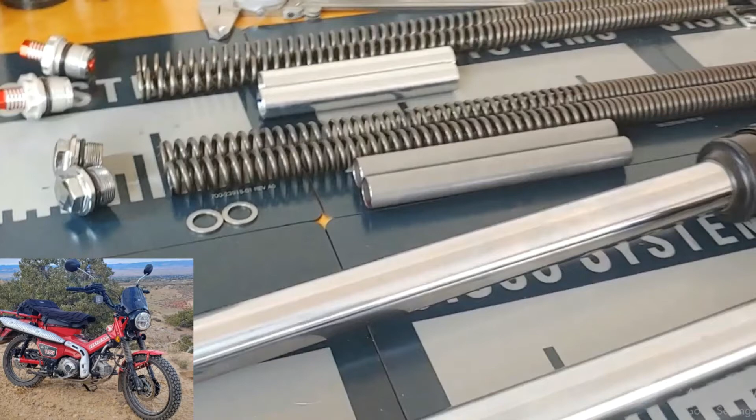Hey y'all, this is just my thoughts and my experience this summer with the YSS kit on the Trail 125. I'd recorded some video of the install and I was going to post that, but I wanted to preface it with this bit first.

Right off the bat, my fork was kind of clunky and seemed to bottom really easily. I just chalked it up as a quirk of the bike. So I bought the YSS kit that first month, didn't see any other options out there, just assumed it would be an upgrade, and rode it all summer long.

And was never really happy with it. It didn't really bottom any less, frankly. So, kind of a long summer-long review of the kit and how it performed. What I ended up doing, I went back to the stock spring, and I took the forks completely out of the bike to install the kit. But if you're watching this to see that process, I can save you a lot of trouble and tell you definitively, you do not have to remove the fork from the bike to install the YSS kit.

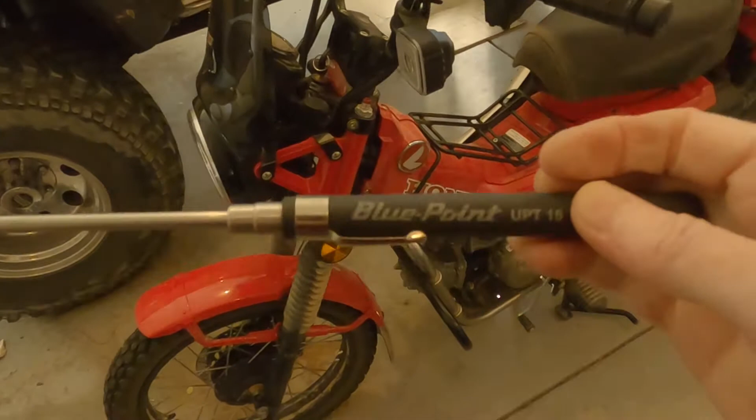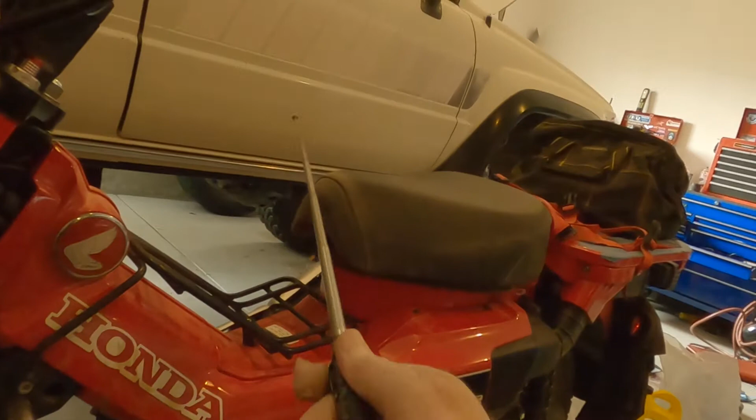All you need is a magnet. This happens to be a Blue Point I bought many years ago, pretty strong. But all you have to do is take the top cap off and pull the components out with a magnet. No brainer, right? I should point out this is a telescoping magnet, it's quite long, but you don't need anything this long to get the stock components out.

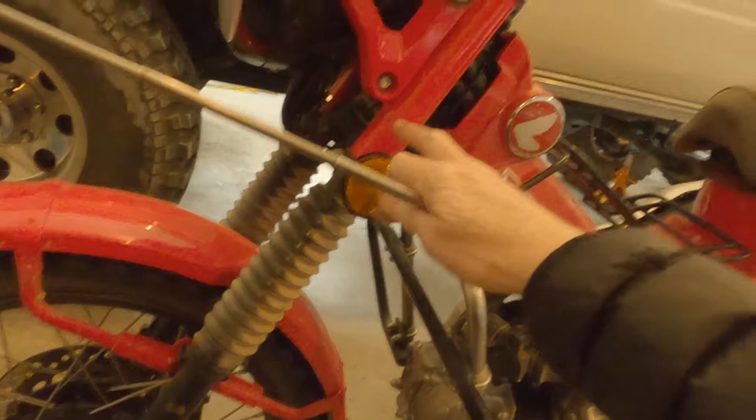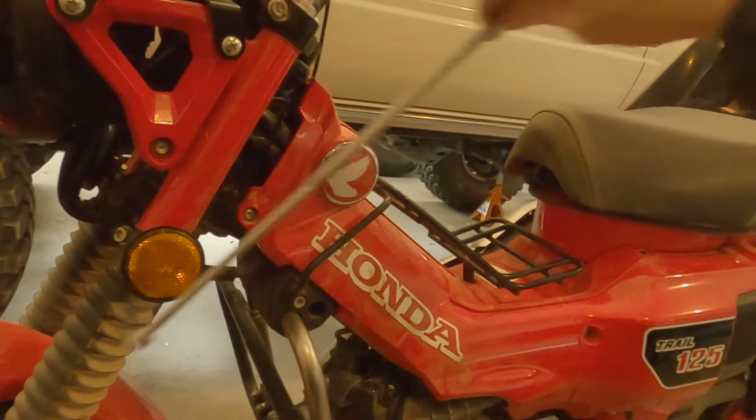If you can visualize, your spring's going to sit down here. It comes to about here or so, and then you've got a little washer, and then the spring spacer itself underneath the cap. So to remove the stock stuff, a magnet 10 or 12 inches long would probably do it.

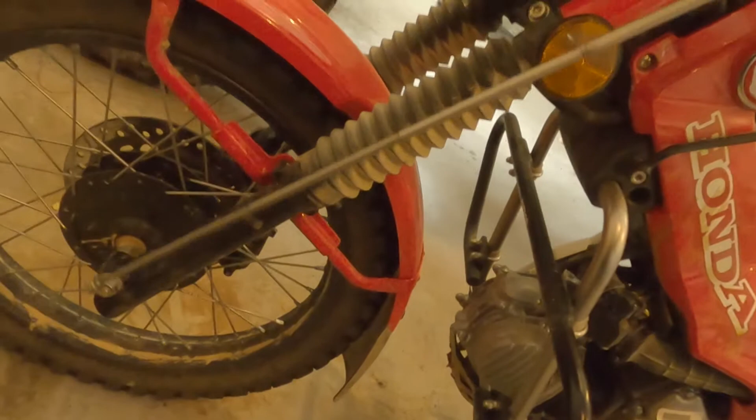But I wanted to point out, if you install the YSS stuff and ever want to remove it with a magnet, keep in mind that besides the spacer, washer, and spring, you've also got the little PD valve all the way down here in the bottom. So to remove that with a magnet, you're going to need something quite long to reach almost down to the very end. Food for thought.

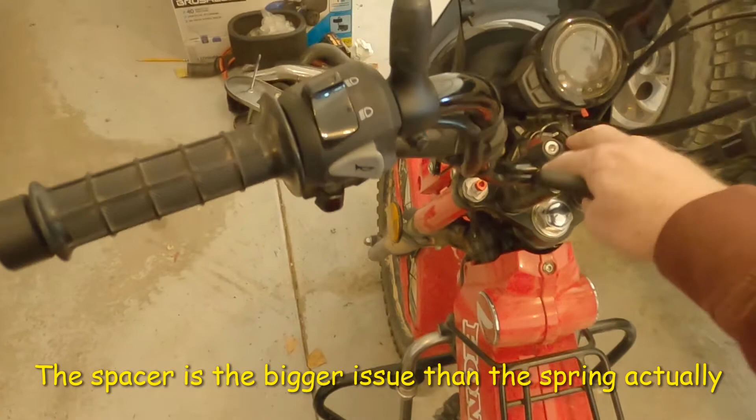The only thing I had to do was get the bars out of the way, since the spacer pulls straight out. I just loosened mine and set them up here and had total access to it. Very simple — it saves you, I was going to say half the time, but it's even less than that. It's really quick, whereas taking the forks off is pretty involved: the wheel, the brake, getting the tubes out of the trees. I did film that process as well, but I don't see the point of posting it because you don't need to do it.

Also learned this little tidbit, just learning as you go — the Allen bolt on the bottom is a drain bolt, so you can drain your fluid.

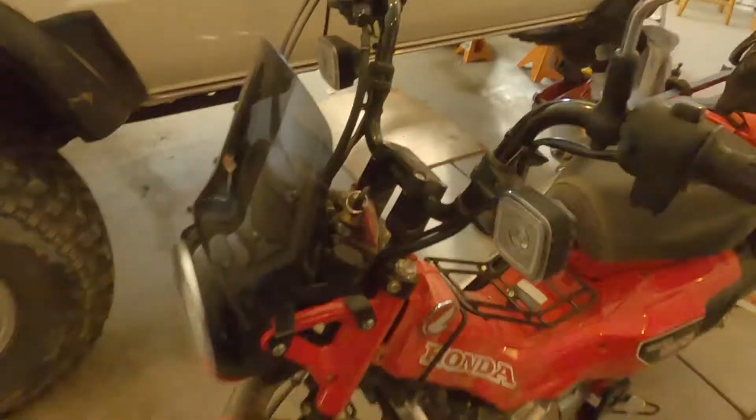Once you install these preload adjusters, I started with them all the way out, obviously, just barely touching the top of the spring. What I ended up doing over time, every ride I'd go on, I'd put in a turn or maybe a turn and a half. I put a mark on the top of them and counted my rotations, kept a 10 millimeter wrench in my pocket, and every time I'd stop I'd put a little more preload on them. I quickly lost track of how many revolutions, as you do.

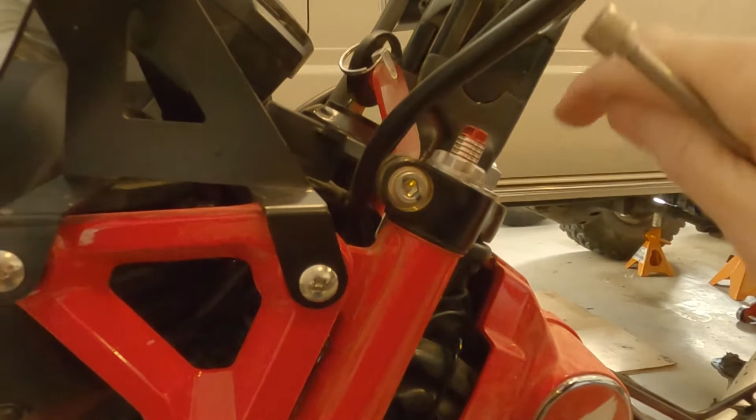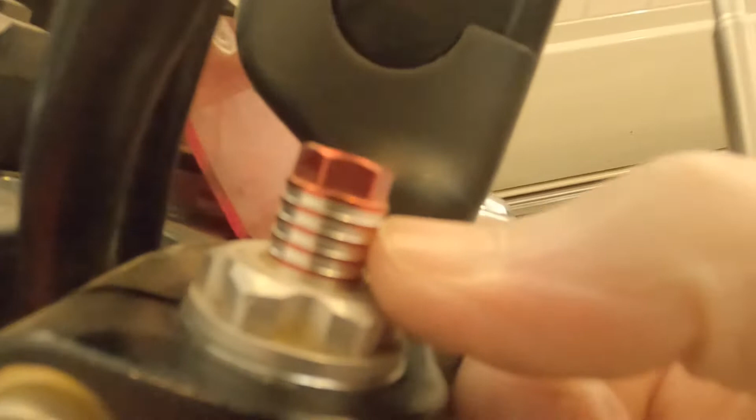So I ended up tracking it by the anodized red lines, and just matched them left to right. But long story short, I got all the way to the top — I went through the whole range of adjustment.

And what I would say is, roughly about halfway through the travel of this thing, the fork gets noticeably stiffer, more so than any point up to there. It just all of a sudden seems to get really hard — going down the road, it's just more jarring. It's kind of hard to describe, but it seems to get stiffer but not better, if that makes sense. It didn't bottom any less, that's the moral of the story. Even cranked all the way, I was still getting bottoming.

And all I can think of, and as I said in the other video, I'm not an engineer — I don't know what the hell I'm talking about most of the time.

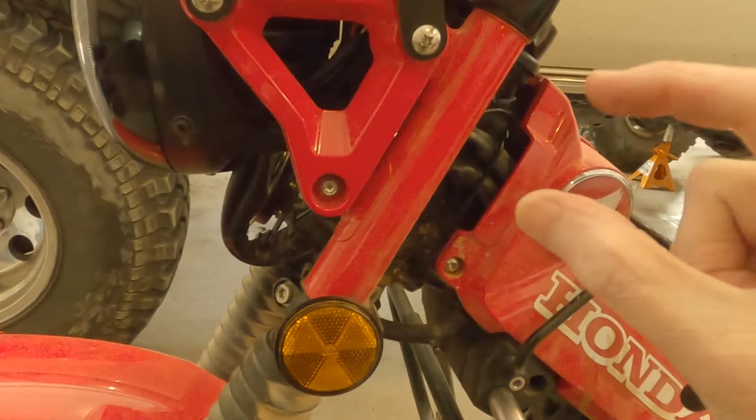I think what's happening partially is the more you compress the spring, you're losing travel out of the spring, right? You're compressing all those coils, so there's less travel to work with. And I think that's why it's still bottoming.

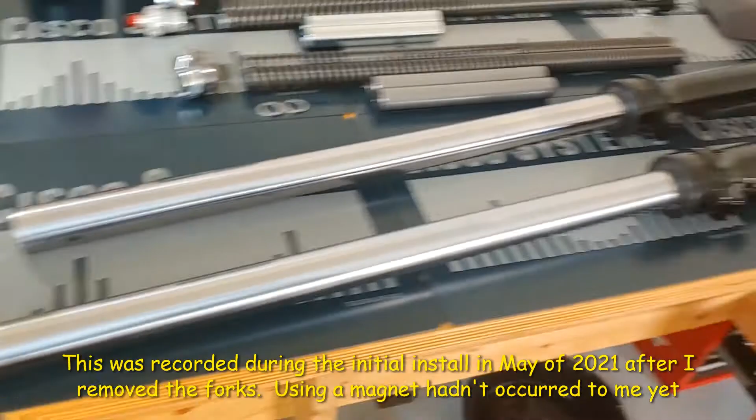Here's the YSS kit next to the stock components. I got both forks completely disassembled and drained. YSS kit here on the top, and stock components here.

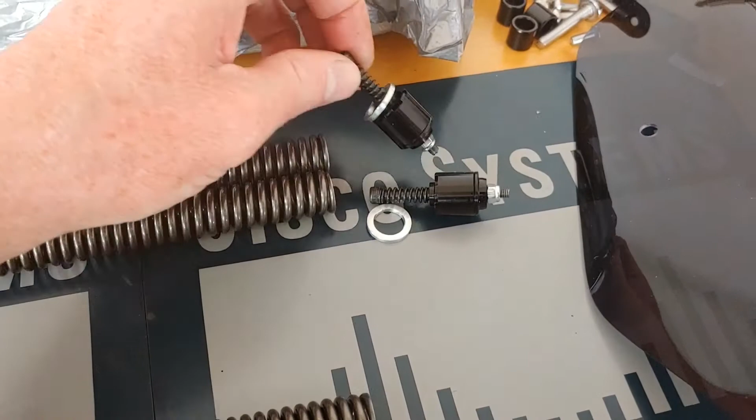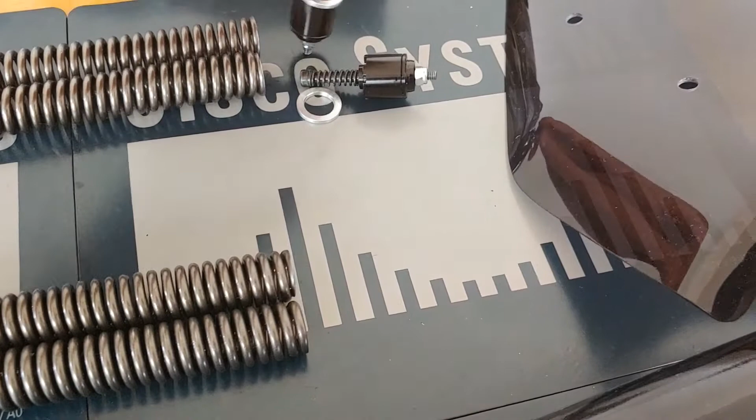Biggest difference you'll notice when you get it is the addition of this valve. They call it the PD valve. Installs at the bottom here of the spring. This is the bottom of the fork. Stock setup doesn't have this. Mine came taped into the packaging like so with this spacer on the valve. I'll point out more in a minute why I'm mentioning that.

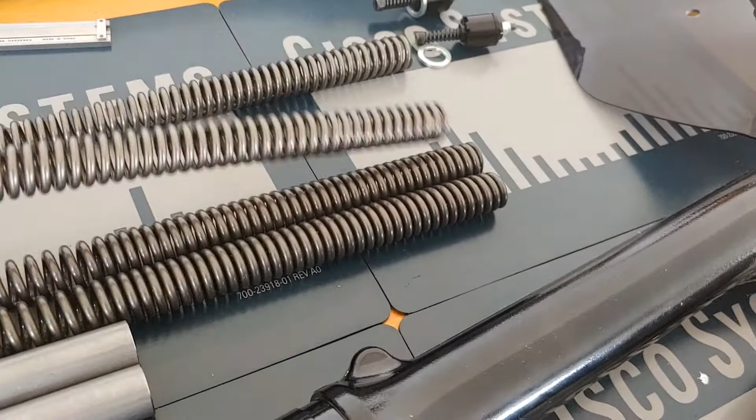The spring is different in a couple of ways. It is slightly longer, the YSS spring. And initially I thought it wasn't wound quite as tight. But if you look at it, the gap between the coils is a little bit bigger than the stock spring. But the more I stared at it, I realized what it is that the wire diameter of the YSS spring is a smaller diameter than the stock spring.

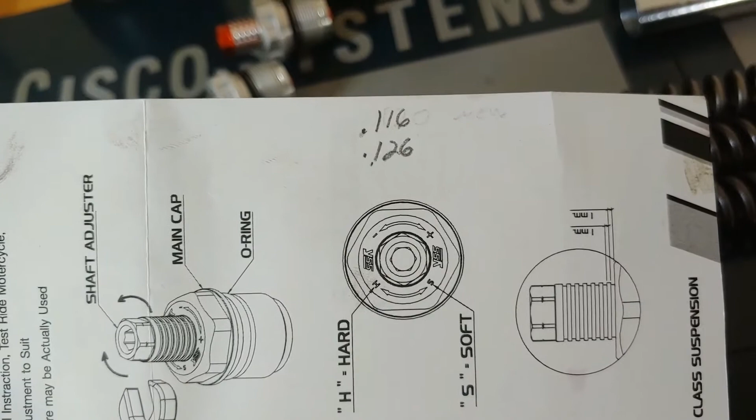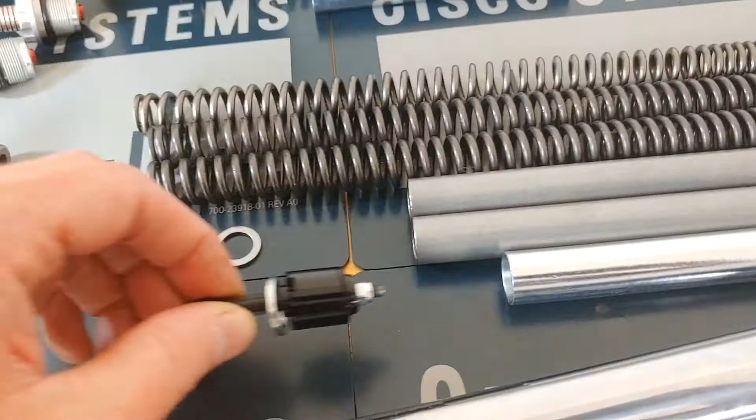Put some calipers on it to confirm, and what I got was, and these are rough, I don't know how accurate it is, but .116 for the YSS spring and .126 for the stock spring. So that's a difference. The YSS spacer is shorter than the stock spacer, and that would most likely, I'm assuming, be to take up the additional length of the valve and possibly the additional length of the spring.

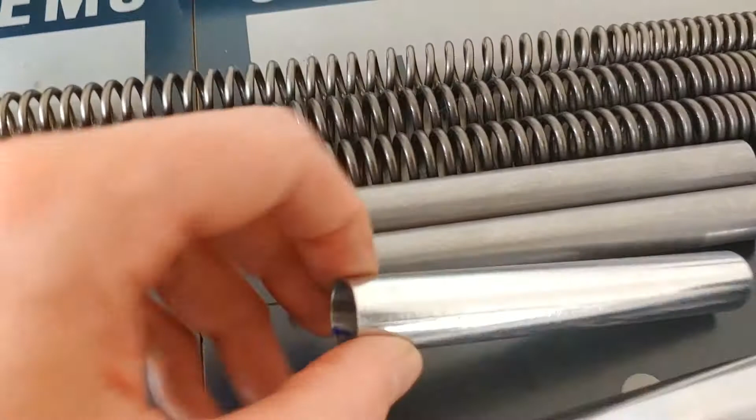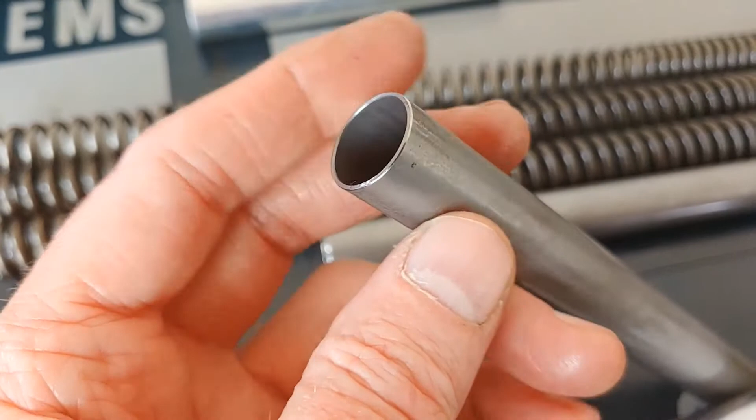The spacer is a little bit interesting, just to be a Honda fanboy here for a minute. You can see the seam in this tubing, but if you compare it to what you get out of the Honda fork, it's truly a seamless piece of tubing. It's higher quality. It's been chamfered inside and out, a little extra attention to detail.

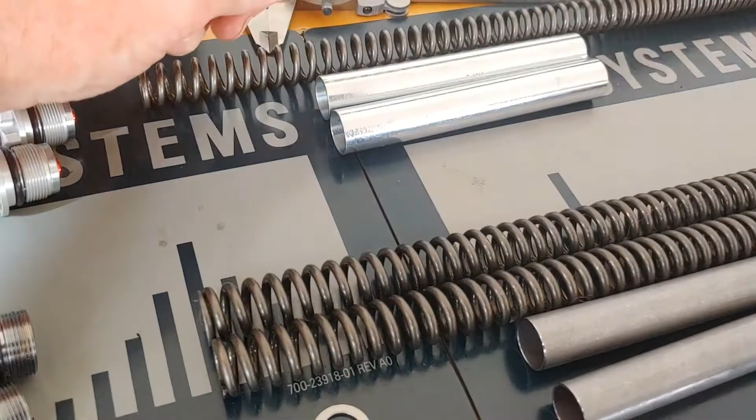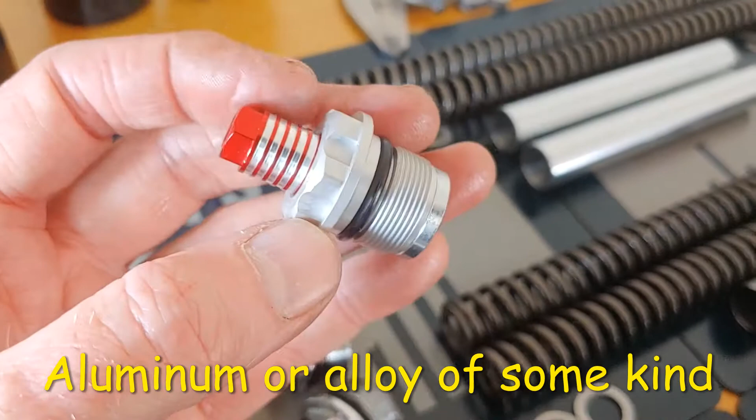The other big difference is the end caps of the stock versus the YSS. The stock obviously doesn't have the preload adjusters, but the bigger difference is the stock caps are steel and the YSS caps are aluminum. And I don't know how big a deal that is. To me, Honda spec'd steel for a reason, and for me that's almost enough said.

I don't know if this is going to be a problem long term. I personally would prefer to pay a few more dollars and get steel. I would imagine that's part of it, or if not most of it, is that this might be easier to manufacture, cheaper to manufacture in aluminum versus steel. But I think it's a bit of a shortcut myself. How they'll hold up long term, who knows?

I would guess this is sort of a set and forget. Once you torque it down, set your preload, you may never touch it again. Might be fine. You know, obviously being softer material, the more times you remove it, more times you put a wrench on the end of it or socket, the more susceptible it could be to rounding and stripping, but time will tell.

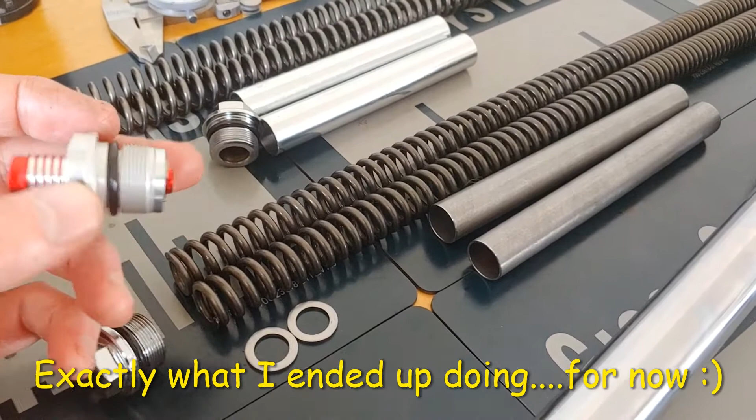When you look at this kit and you look at these, you wonder if you couldn't just install this, if you could find these, maybe somebody will make them, and just install this in the stock fork and increase the preload on the stock spring and improve the fork massively. At least for my needs, I just want it a little stiffer. But I didn't see these offered separately. I didn't search very hard for that, but maybe they are, but might be a lot cheaper option to just try these with the stock spring if it was at all possible.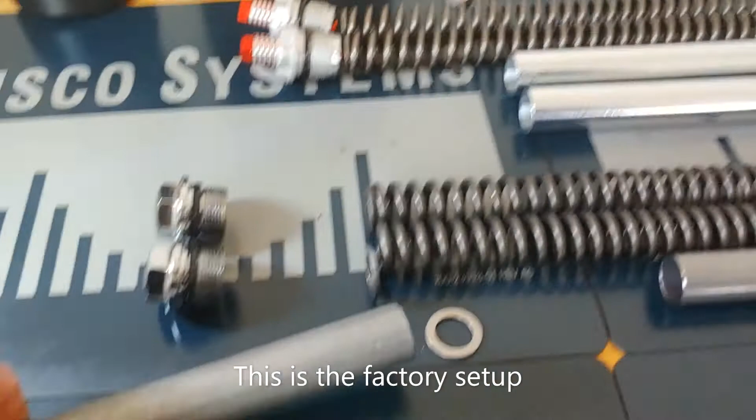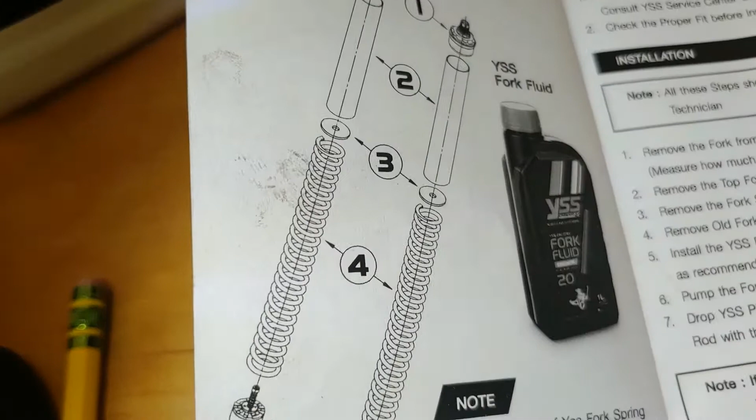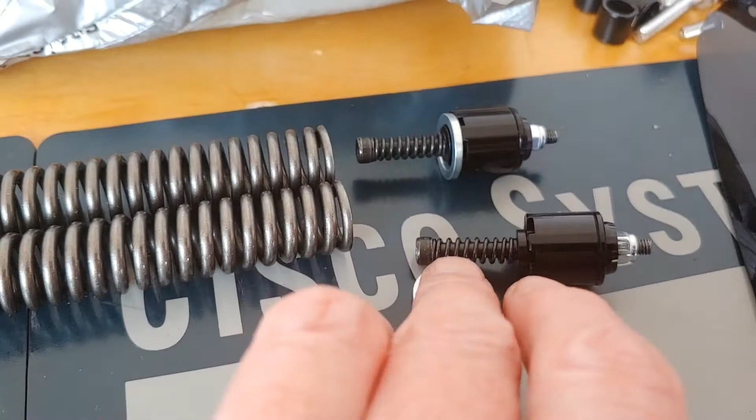So the other issue I've ran into, or question mark I should say, is regarding this spacer and the spacer that came on the valve. I notice the instructions show a washer between the spring and the spacer. This washer does belong here between the spring and the spacer. All fine and dandy, makes a lot of sense until you get into these instructions. It does show one there. It does not show one down there on the PD valves. So you take all that to mean this washer was probably just put here for a shipping convenience, and it actually belongs up here between the spring and the spacer.

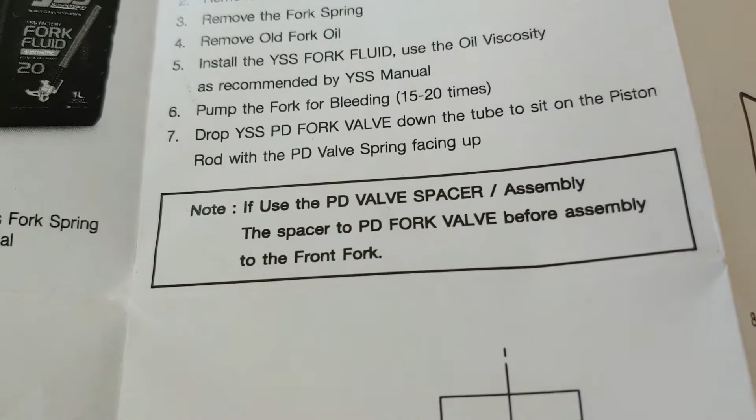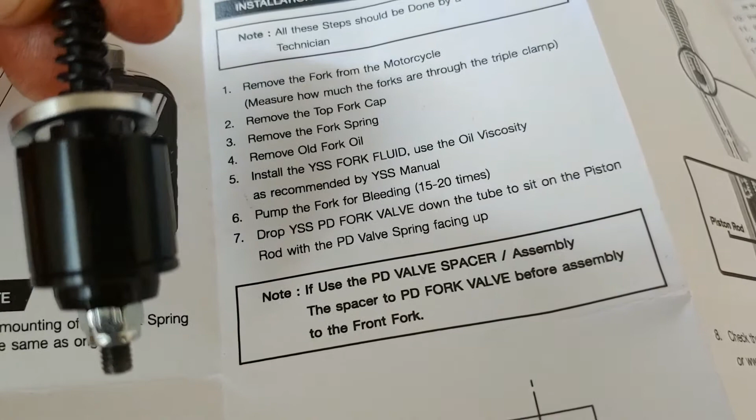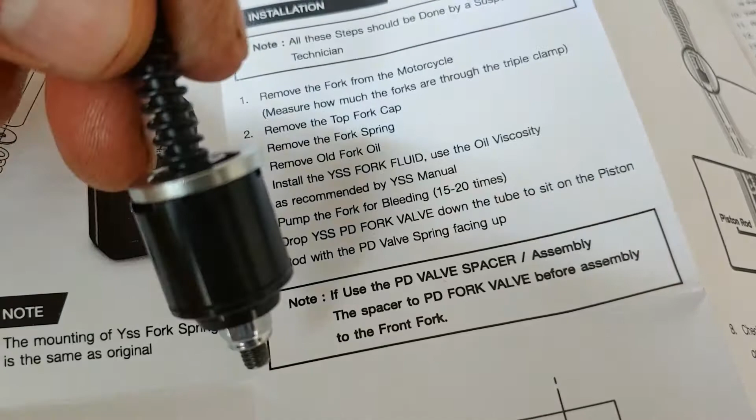So I was fine with that until I read this note here. And this is regarding this valve. And it says if you use the PD valve spacer assembly, the spacer to PD fork valve before assembly to the front fork. I've read this 100 times, and the only thing I can assume that means is that this spacer goes on this valve. It says the spacer to PD fork valve before assembly to the fork.

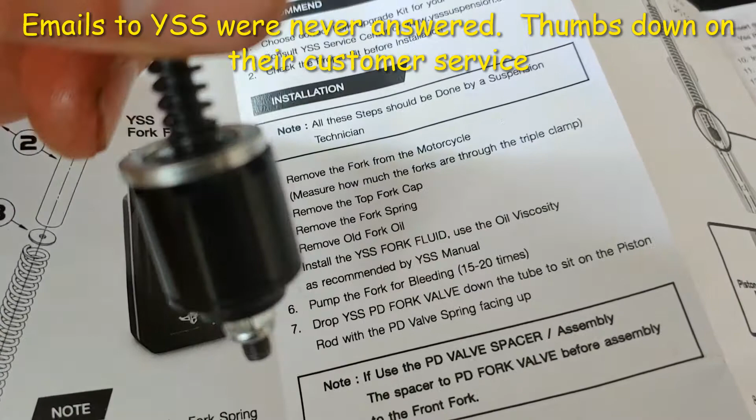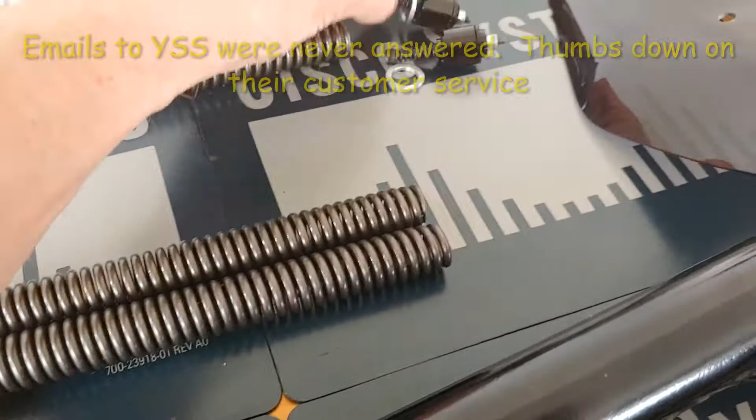The parts diagram does not back that up at all. So that's a bit of a mystery, not sure what that means. Also, it says if you use this valve spacer, which makes you think maybe you don't even need to use that. Subject for another conversation, I guess.

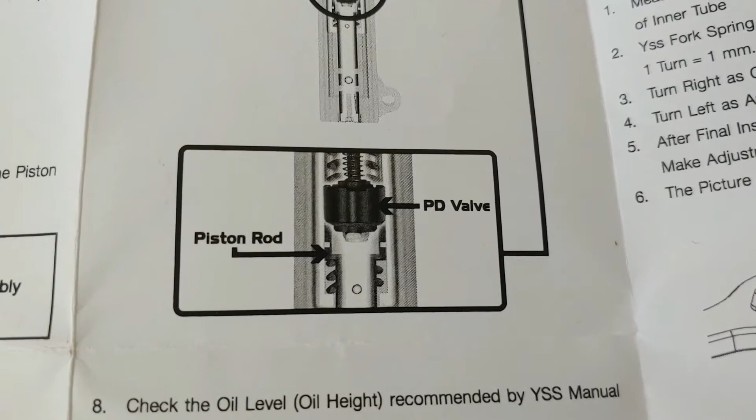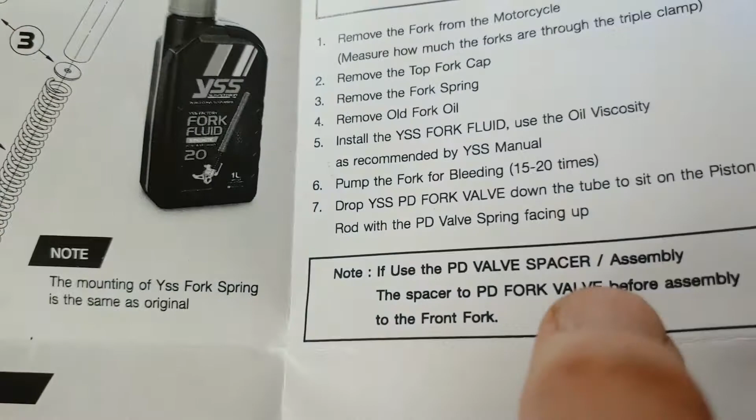It shows a diagram of it here too, and also doesn't show that, as far as I can see. Doesn't show a washer in there either. So I'm not sure what this note means. Everything else in the instructions would tell you there is no spacer there, but I don't know how to interpret that. There's nowhere in the instructions that tells you how much fluid to use.

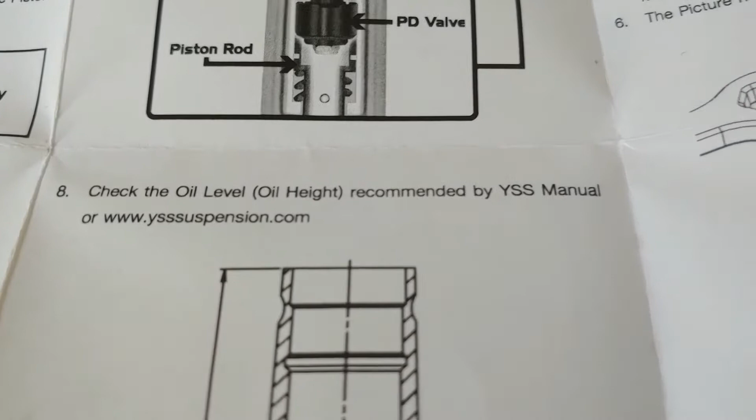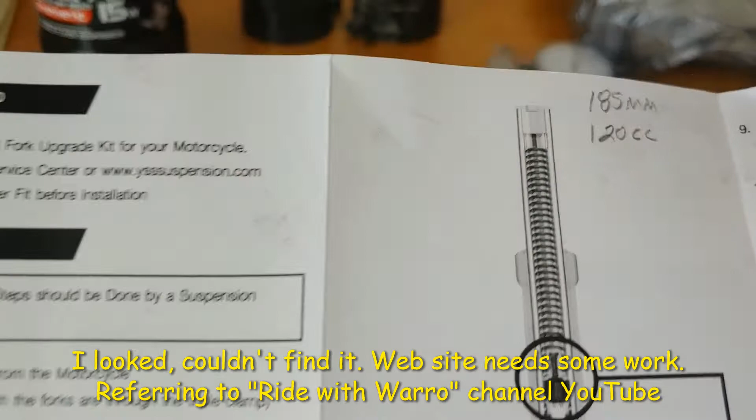It does say to check the level recommended by the manual online. I haven't checked that, they may have it posted there, so it shouldn't be too hard. But I did see a comment on a Warro's channel regarding this kit. Someone commented that the numbers are 185 mil or 120 cc's, 185 meaning from the top of the fork, 185 mils. So that's easy to do.

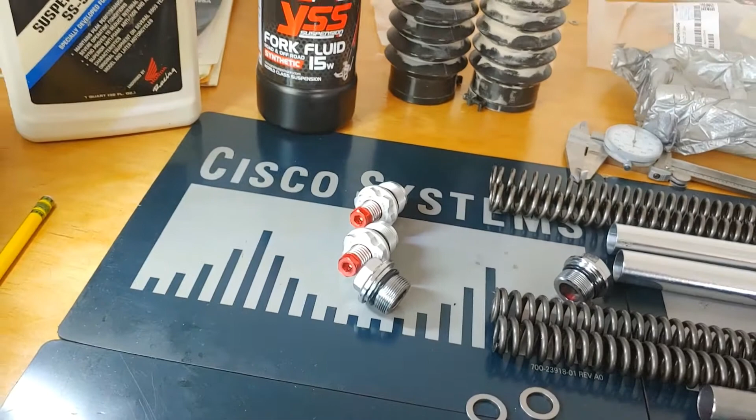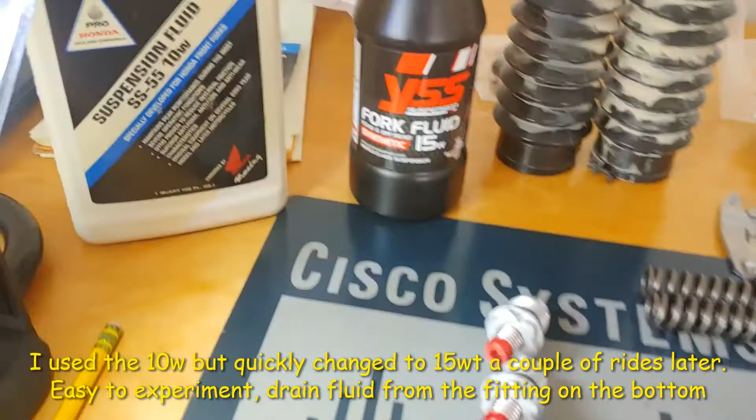Shouldn't be a problem. On the topic of oil, they do ship you with 15 weight. I think that's something to ponder myself. I wasn't unhappy with the damping of the fork, and I would hate to over-dampen it with thicker fluid. I do have this old 10 weight Honda, and it looks and smells exactly like what came out of the fork. I've Googled ATF weight, and what I read is that it is basically a 10 weight oil, once again assuming it's an ATF. So that's something to consider. I don't know how hard this would be to experiment with oil changes.

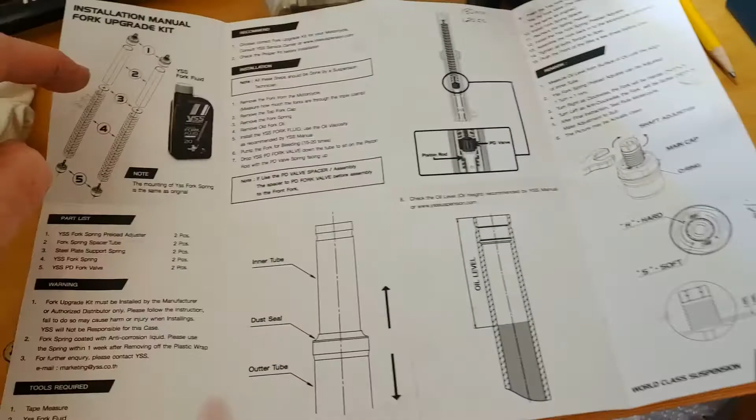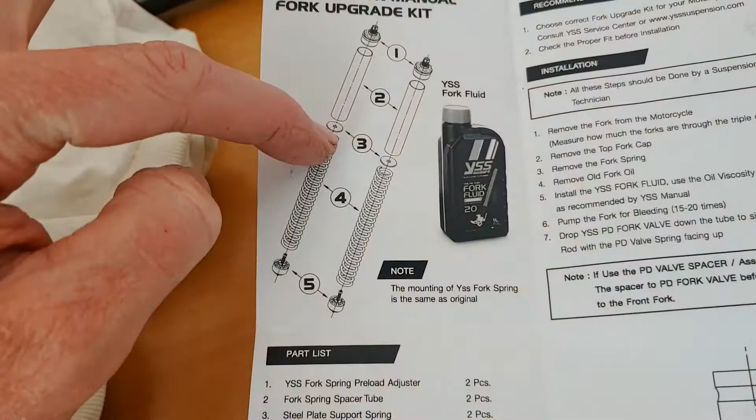The only other fitting on the fork is down here at the bottom. So after more thought about this regarding the contradiction with the spacer, what I decided to try is, if you recall, the confusion about whether you have a spacer here and here, or just one here. I actually translated the Thai verbiage here, hoping I'd get some insight.

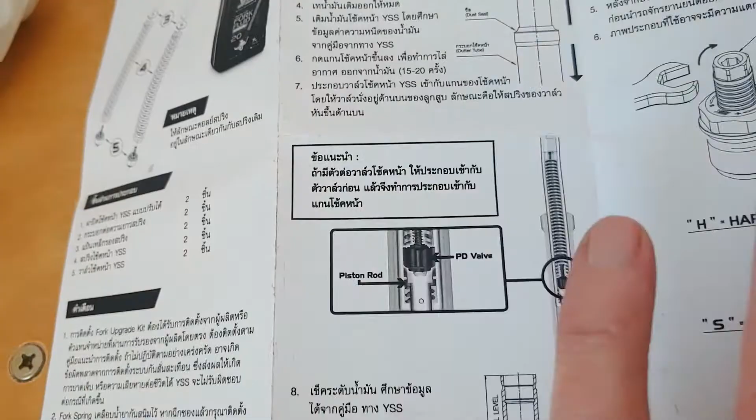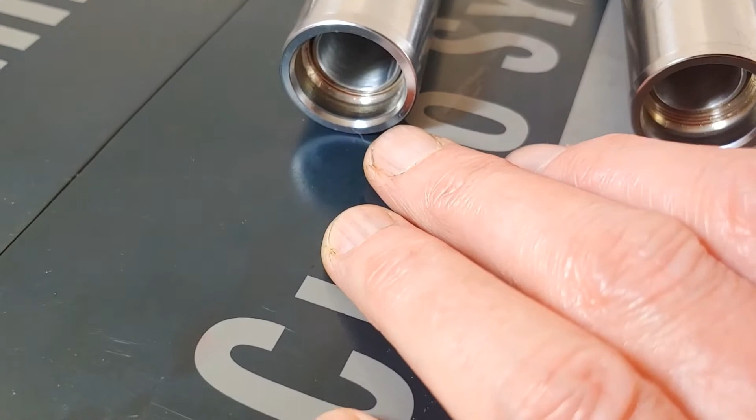Didn't really help. This is actually better, but still confusing. So that's the difference it makes if you install both the spacer in the kit above the PD valve and the spacer from your old application between the spring tube spacer and the spring itself. This one, so that's basically with both spacers in.

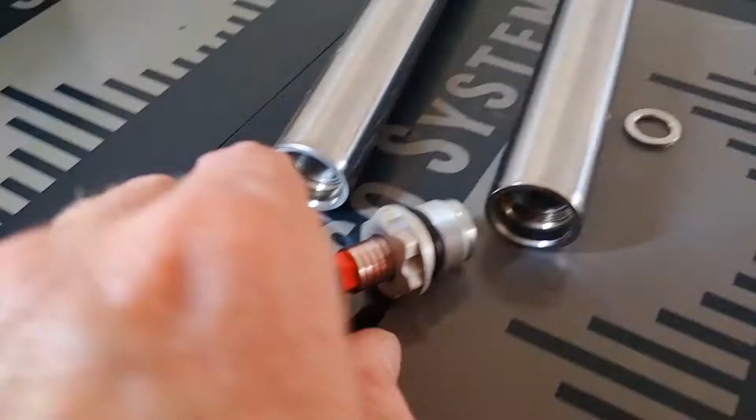This one is just with the center spacer in and no spacer on the PD valve. And I guess this was already obvious, basically what that spacer would do, for one thing, would increase the preload. So you can see as soon as you thread it in, you're already preloaded right away, sooner than you are here. I'm going to go with this option and the 10 weight oil, and we'll see how she rides.

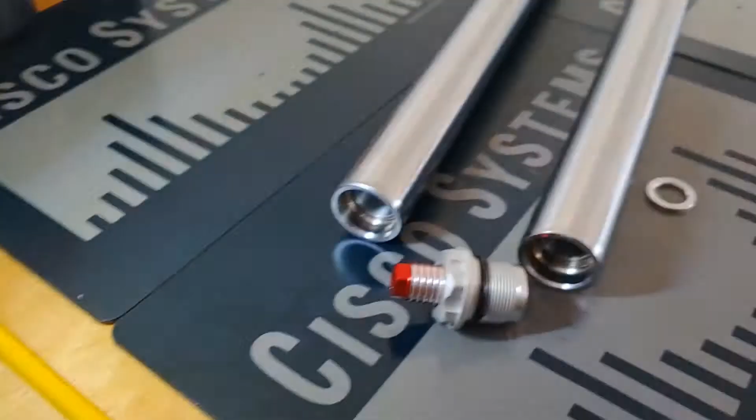I think I've overthought the entire thing. If you were to just look at this and install them, you wouldn't be asking yourself this question. It's just simply that note that kind of threw me off on a wild goose chase. I think it's going to be similar either way because you've got the adjustment on the preload adjuster, so you're not giving away any preload. I think you'd probably be able to overcome all this additional preload on this fork with the adjuster, if that makes sense.

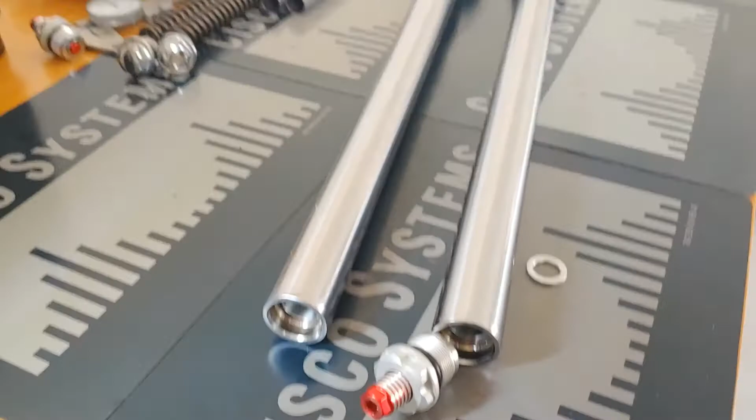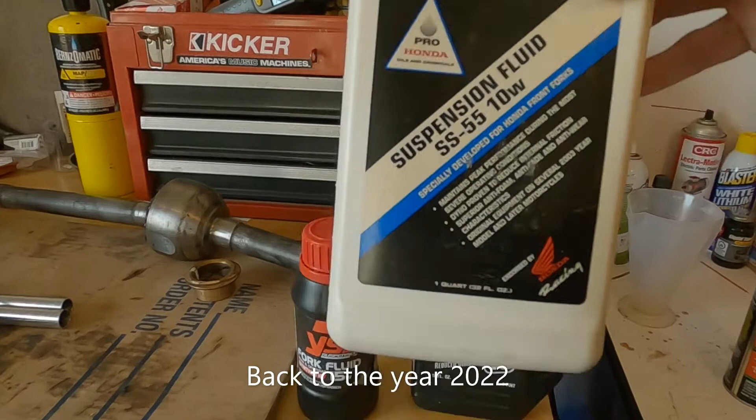So hope that's helpful. Sorry for all the additional detail, I tend to overthink everything and scrutinize things more than I should. So what I ended up doing initially is I installed this 10 weight Honda oil I had laying around, which seems to be pretty much the same as what came out of it. It smells the same, feels the same. I ran that for maybe a few rides, and then I decided to try this stuff and was much happier.

The reason I never used this stuff was because I'm an idiot and somehow did not realize that milliliters and cc's are the same thing. I don't know what I did wrong, but I somehow converted it at the time and got it in my mind that this wasn't enough for both forks, which in fact it is exactly enough, with 10 milliliters to spare. So that's why I did that. This probably works fine, I just didn't try it.

As a quick summary to all this, I apologize if this video is a little disjointed. This was originally done, I installed this kit in March or April of 2021, and it's now January of '22. But just to summarize it for me, at the end of all this you've watched, what I ended up doing, as I've said, is I put the stock spring back into the fork because I was not happy with the clunking noise. The stock spring, in my opinion, performs better.

I left these caps in, as I mentioned in the video and theorized in my original install, and it seems to work pretty well. Just last night as I was editing this video, Daniel from Thailand, who has a channel on YouTube, mentioned that if you add a little more fluid to the fork, you can get rid of the clunking noise. I haven't tried that yet. When I changed out the 10 weight for the 15 and noticed a big improvement, I had that thought, but I didn't want to blow the seals, so I left it at the 120cc level, which is the recommended amount.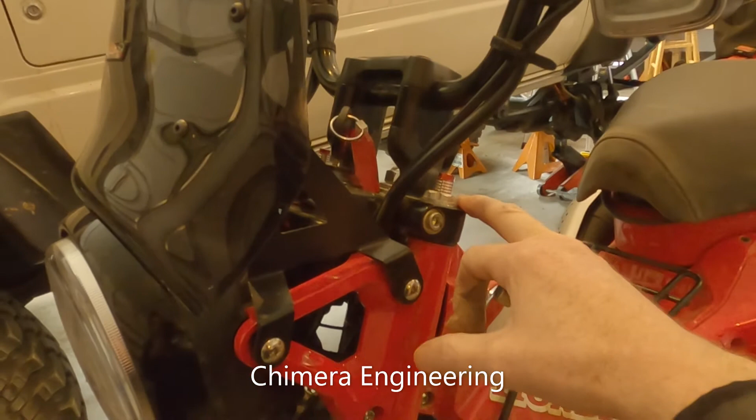I hope this is helpful, along with my thoughts, being completely non-authoritative on the subject. The market itself is changing constantly—I just saw a post on Facebook that someone else is offering a preload cap. It didn't look like it had adjustability though, just a deeper cap to put more preload on the spring, which isn't bad. The price wasn't a whole lot less than the YSS kit itself, if I recall.

I think as designed, it's pretty well thought out, but this constant need to improve and do things differently gets a little tiresome for me after a while. The bottom line for me is, how deep do you want this rabbit hole to go? At some point I feel like you cut your losses and just accept the bike for what it is. On the flip side, it is a lot of fun to tinker with, and I totally understand that too. For me personally, I'm going to leave the spring as it is for now.

I am going to add some more fluid to the fork to see if that gets rid of the clunking, and I'm definitely going to do some improvements on the seat. We'll go from there. I appreciate you watching—I hope this is helpful. Let me know if you have questions or comments, and happy riding.